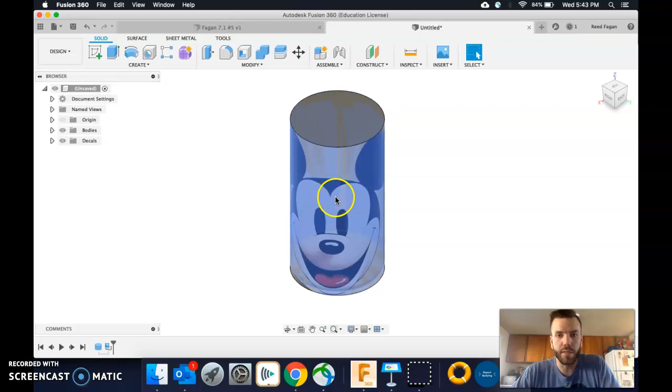I'm going to show you how to put a decal on your object or design. It's pretty simple on Fusion 360, even easier than it is on Inventor from what I can tell. Here, I've got this Mickey Mouse decal wrapped around this cylinder. I chose a cylinder because it's a little more challenging than a normal face. The general steps are: I need to have the object, in this case a cylinder, and then add the decal. Let's see how that works.

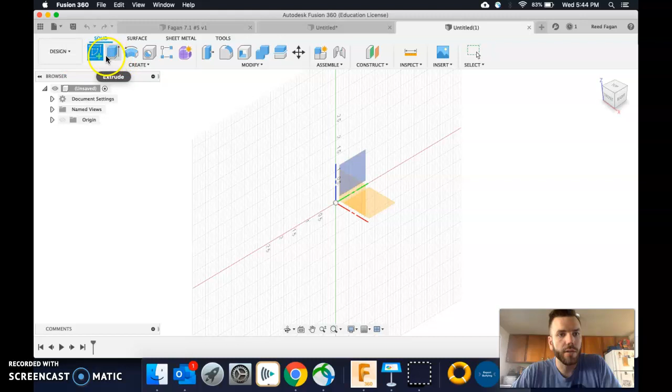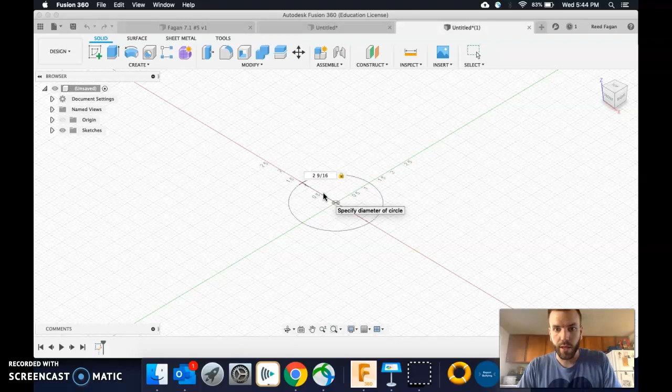I'm starting a new design, and I'll go to create a solid here. In fact, let's just go to cylinder. We'll choose this XY plane, and let's do right on the origin. I looked up the Coke can sizing, in this case a Dr. Pepper can, and I found that it was 2 9/16 of an inch in diameter, and then it is 4 3/4 of an inch high.

Of course, there's some filleting, but we're not going to worry about that right now. So I've got my can, and more than a Mickey Mouse decal, it makes sense to put a Coke decal on there, and you can find those videos on YouTube. But let's put the Mickey Mouse on here.

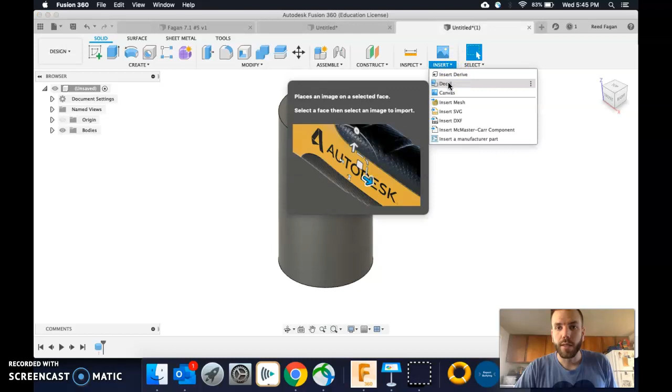All I need to do, now that I have my form, is go to Insert, Decal, and select an image I want to use. I'm going to do Insert from Computer. I go to my folder—I was recently in this folder, that's why it popped right up. You might have to do a little bit of digging, but don't make it too hard on yourself. Save your files well. Click Open. This is the file. The face is going to be this face here.

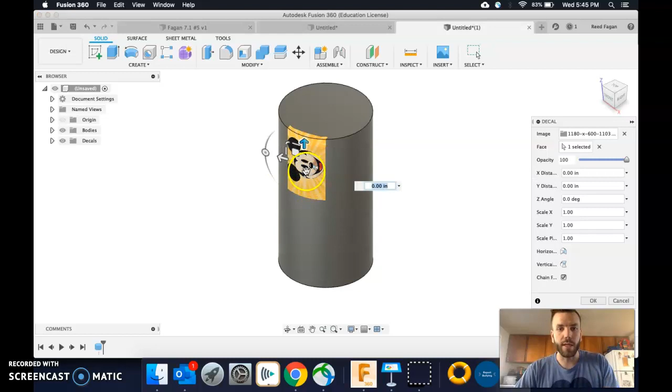And now I have a number of things I can do. I'm sure you will figure out even better ways to do this than I know at the moment. But first I want to rotate this, and this nicely lets us snap it to a 90-degree rotation there. Then I want to resize this, reposition it. So let's shift this a little bit so I can see it a little better.

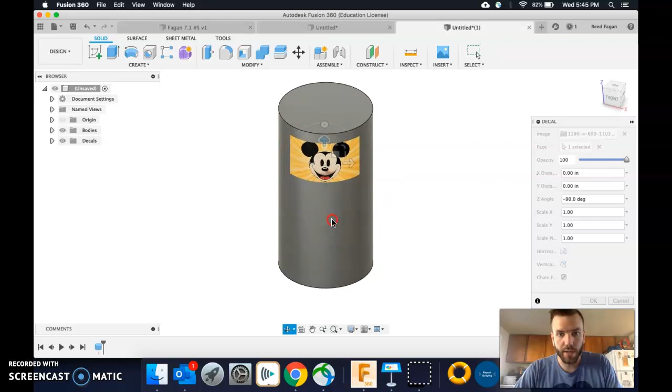I'm going to drag the whole thing down. Let's see if it lets me do that. Oh, that's not what I wanted to do. Command Z—oh, and it undid everything. All right, try that again.

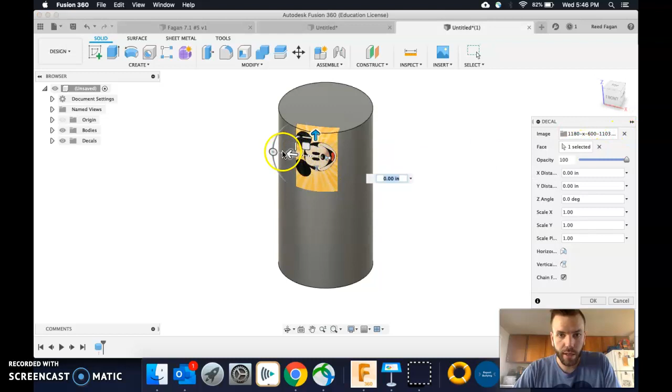Insert, decal, insert from my computer, open, select face—this is the face. Again, I'm going to rotate this 90 degrees. Let's see if I can not make it angry this time. There we go. I'm going to bring it down towards the bottom.

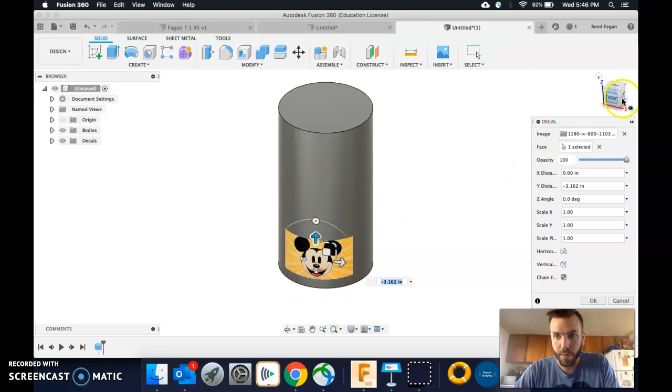Now, I think there is some blank space actually underneath this, what you can see in the yellow outline there. So that's why it might be warping a little bit as it gets towards the bottom. If I do front, you'll be able to see what I'm talking about—it starts to warp as I go further down. Yeah, I think there is some blank space as part of this file. But let's go about here.

And then we can start making this thing larger. We're doing that, and then I can adjust a little bit, doing this some more, bring it up a little further, and just keep making it larger and larger.

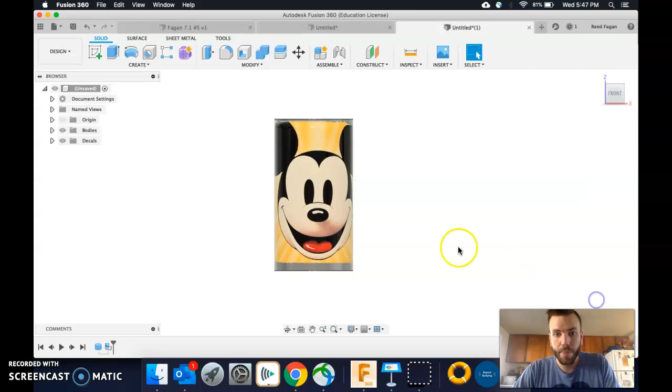I'm going to zoom out. Like I said, I'm sure there are even better ways to do this, ways that you'll figure out. But for now, I just wanted to share this with you, so if you're wondering how to do a decal, you could at least get started. All right, that looks about good. I'm going to click OK, and I can check out what I have here, and it wraps all the way around. Now, it wasn't a perfect sizing or shape, so that's why it looks funky over here, but you get the picture.